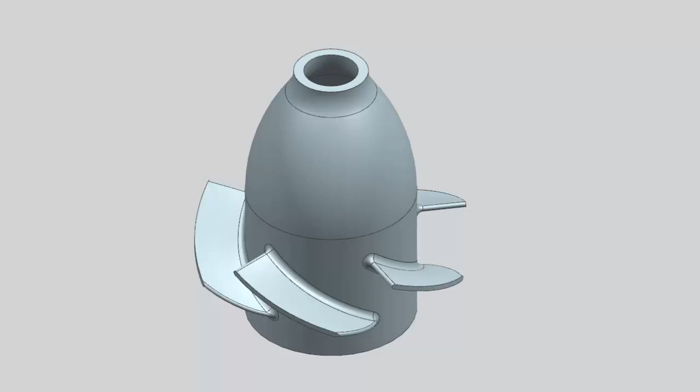Welcome to another in the series of demonstrations designed to get you quickly up to speed with what's new in NX-CAM. This video will demonstrate how you can perform hybrid manufacturing by combining an additive metal deposition process with the traditional NC machining subtractive process to produce highly complex finished parts using a single machine tool setup.

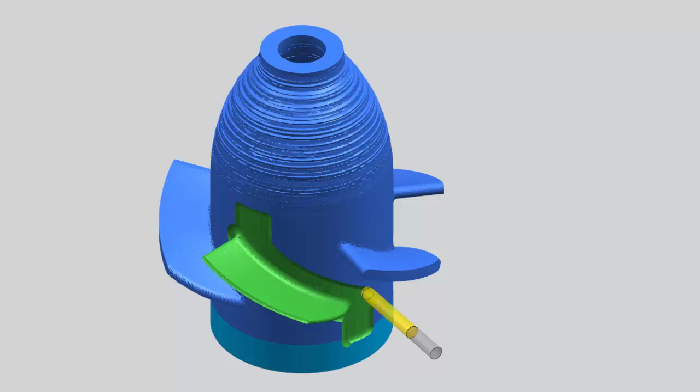In this example, we'll use hybrid manufacturing to create a rotary part. Note that you will need to have an appropriate license to perform hybrid manufacturing. Let's take a look at the objects required to perform hybrid manufacturing.

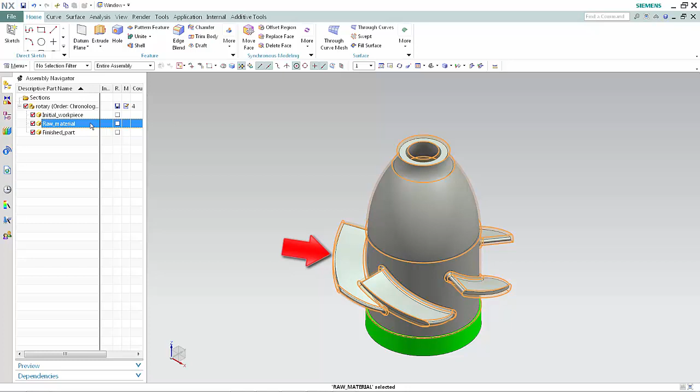The initial workpiece is the plate or base that the material will be deposited onto and is clamped into place as part of the setup. The additive raw material is what will be built through the additive operations. It will be selected as the blank geometry for the subtractive operations. The finished part is the final outcome of the hybrid manufacturing process and is the product of both additive and subtractive operations.

We'll begin by creating the setup. Select File, New. Select the Additive Manufacturing tab. Select the template. Click OK.

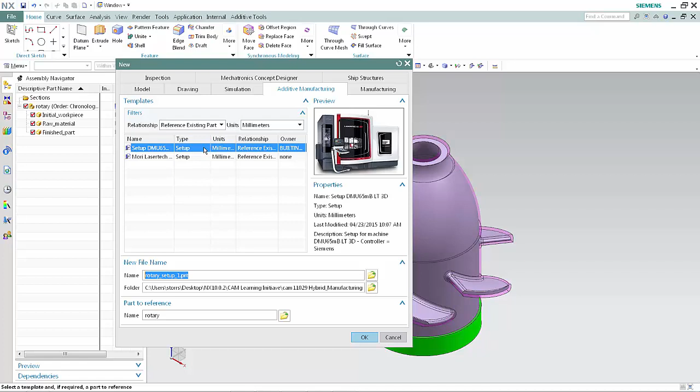The next few steps will remove some of the unnecessary clutter from the graphics window. In the Assembly Navigator, select the checkboxes so that only the initial workpiece, raw material, and finished part are displayed.

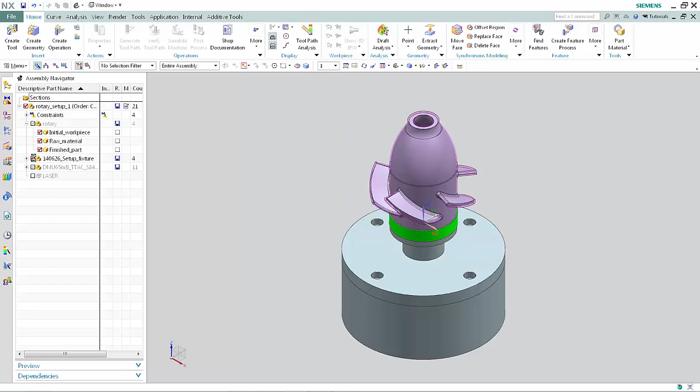Next, we'll create an associative copy of the initial workpiece, the additive raw material, and the finished part bodies. These associative copies are the bodies we'll decompose into additive features and then use for the additive and subtractive operations. Select the Applications tab and select Assemblies in the ribbon bar if it's not already turned on.

Select the Part Navigator tab in the Resource bar. Select Menu, Insert, Associative Copy, Wave Geometry Linker.

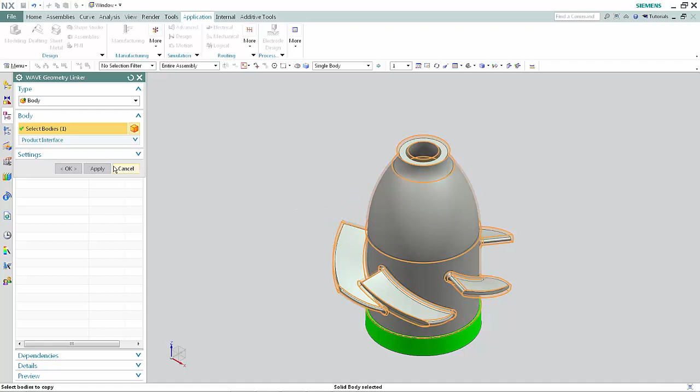Select the raw material. Click Apply. Select the finished part body. Click Apply. Select the initial workpiece. Click OK.

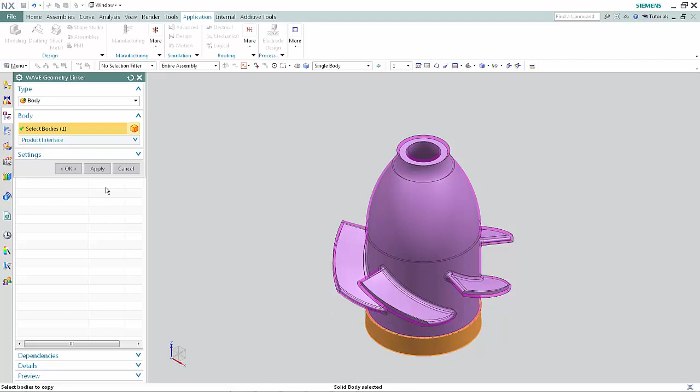Notice the three wave-linked bodies in the Part Navigator. Rename the three bodies.

For now, we will only need to work with the additive raw material linked body, so we'll hide the unnecessary geometry. In the Assembly Navigator, select the Rotary Assembly checkboxes to hide the objects.

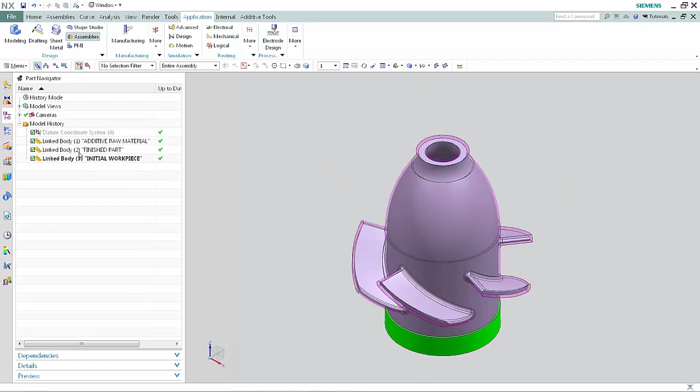Select the Part Navigator tab in the Resource bar. Right-click Finished Part and select Hide. Right-click Initial Workpiece and select Hide. Only the additive raw material linked body should be displayed.

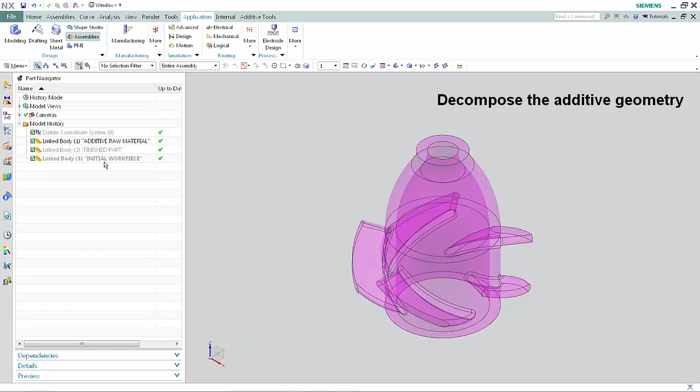Decomposition allows you to divide raw material into individual additive features by extracting bodies. Each additive operation requires a complete body or set of bodies. You may decompose explicitly or automatically.

Explicit decomposition allows you to decompose a specific volume of raw material by specifying a plane that terminates the decomposition at an explicitly defined location.

Select the Additive Tools tab in the ribbon. Select Decompose. For Select Part in the Decompose Part dialog box, select the displayed additive raw material body. For Select Face, select the face on the bottom of the additive raw material as the starting face.

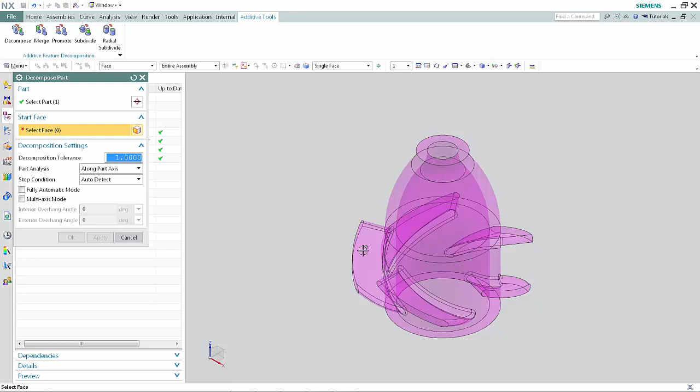Type 10 in the Decomposition Tolerance box. The decomposition tolerance is the increment that the processor uses to step along the part. Larger values result in faster performance, but the value should not be so large that small features will be missed.

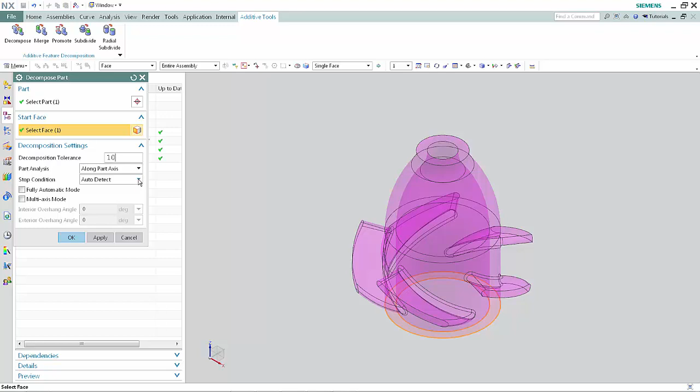Select Stop at Plane from the Stop Condition list. This option allows you to be very specific about the portion of the body you wish to decompose. Select the edge of the additive raw material just above the blades. Click OK.

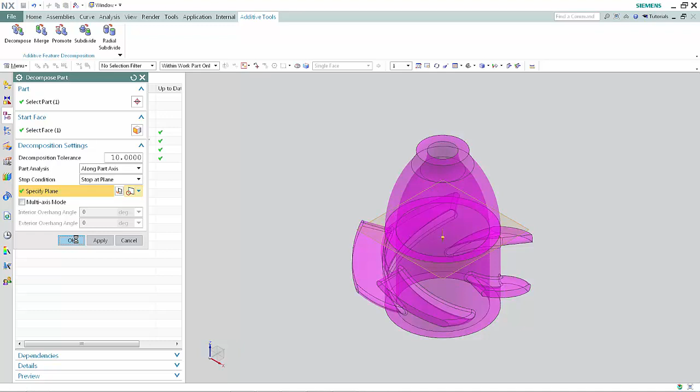The portion of the body between the selected face and the plane has been decomposed into additive features. These new features can be used to create an additive operation.

Next, we'll specify the geometry needed for the additive operations. The base plate is the body onto which the additive material will be initially deposited, and the raw material represents a slightly oversized version of the finished part.

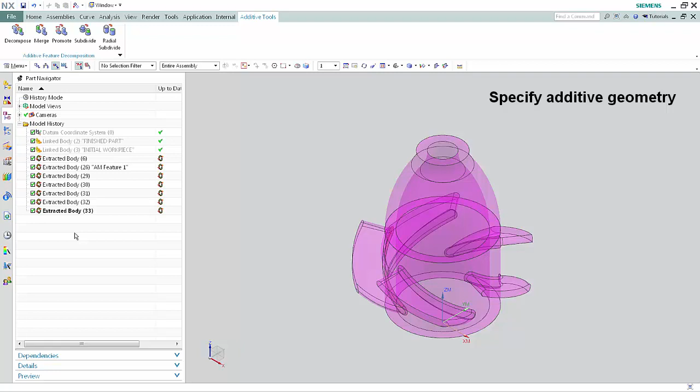Right-click Initial Workpiece and select Show. Select the Operation Navigator tab in the resource bar. In the Geometry view, double-click Hybrid Geometry to edit the object. Click Specify Initial Workpiece.

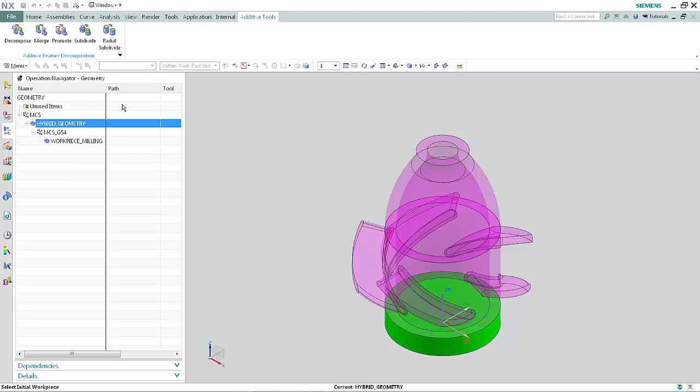The initial workpiece is the plate or base that the additive material will be initially deposited onto. Select the base as the initial workpiece. Click OK.

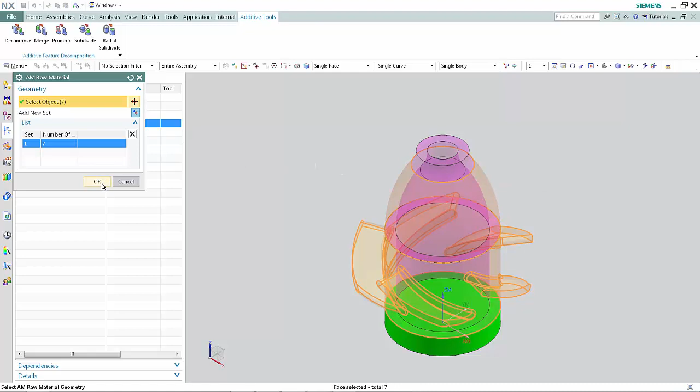Click Specify AM Raw Material. Select the 7 extracted bodies. Click OK. Click OK in the Hybrid Geometry dialog box.

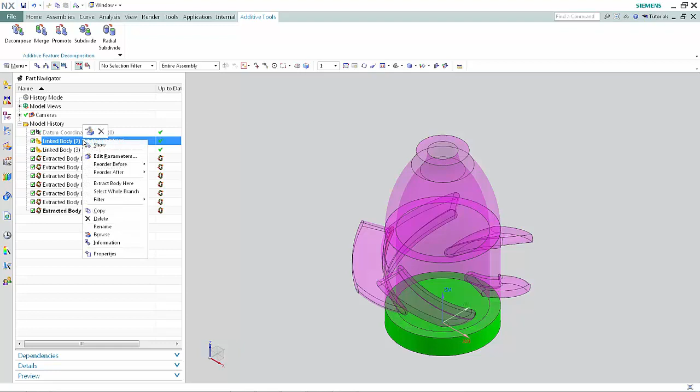Now we'll specify the part and blank geometry for the machining or subtractive operations. Select the Part Navigator tab in the resource bar. Right-click Finished Part and select Show so that the 7 extracted features, the initial workpiece, and the finished part are all displayed. Select the Operation Navigator tab in the resource bar.

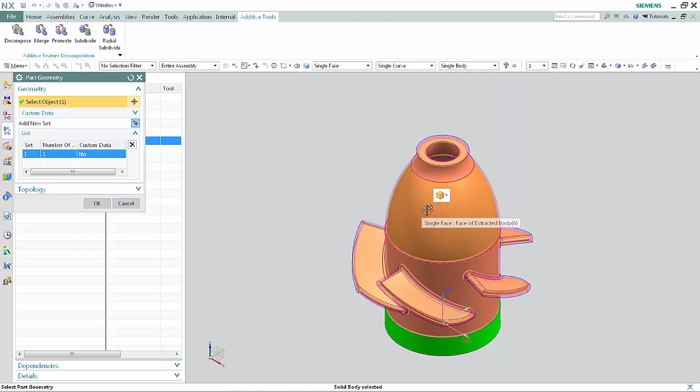Double-click Workpiece Milling to edit the object. Click Specify Part. Select the solid gray body of the finished part as the part geometry. Click OK in the Part Geometry dialog box.

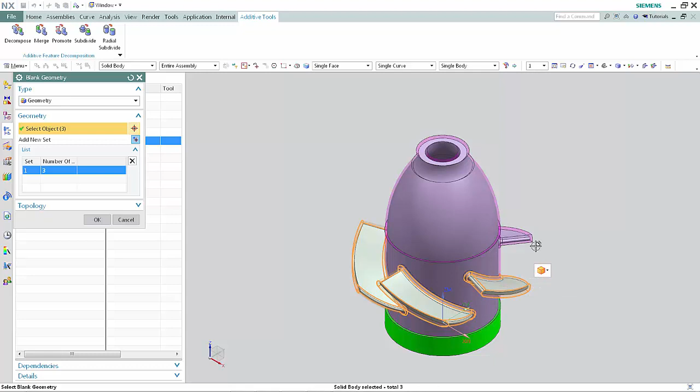Click Specify Blank. Select the 3 extracted bodies as the blank geometry. Click OK in the Blank Geometry dialog box. Click OK in the Workpiece Milling dialog box.

The first additive operation will use planar slicing and a fixed tool axis to form the cylindrical body. Before creating the first additive operation, we'll hide the finished part and the initial workpiece. This will allow us to see the material deposition as the initial workpiece is created.

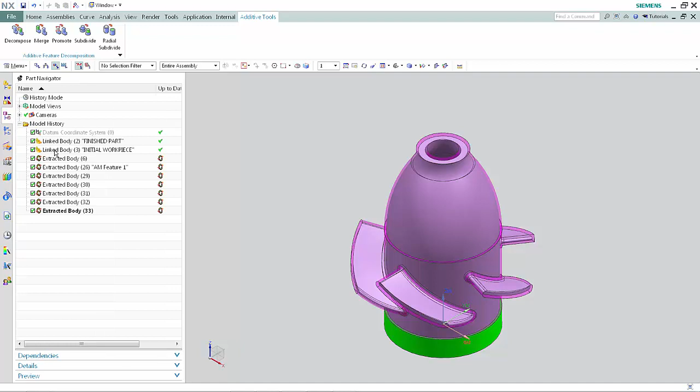Select the Part Navigator tab and hide all of the objects except Extracted Body 26. Select the Home tab. Click Create Operation.

Select Additive from the type list. Select Planar Additive Spiral Inward and Outward as the operation subtype. This operation subtype deposits material in successive planar layers using an inward or outward spiral pattern. Specify the parent items.

Click OK, then click Specify Additive Feature. Select the body you wish the additive feature operation to create, then click OK.

Type 3 in the layer thickness box. This unusually large value will allow you to see the individual layers more clearly. Realistically, the layer thickness would be much smaller than 3 millimeters. Click Generate.

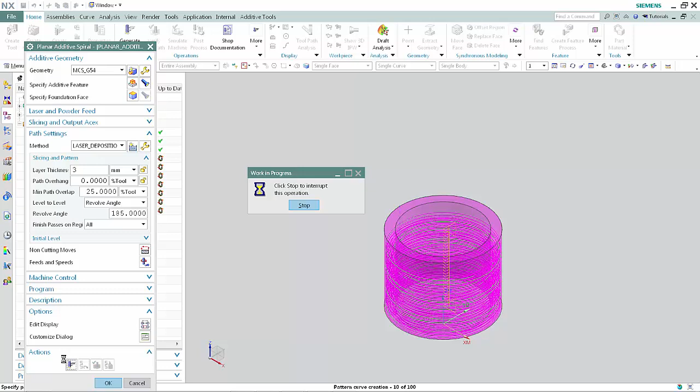Now we can visualize the additive material deposit. Select Verify.

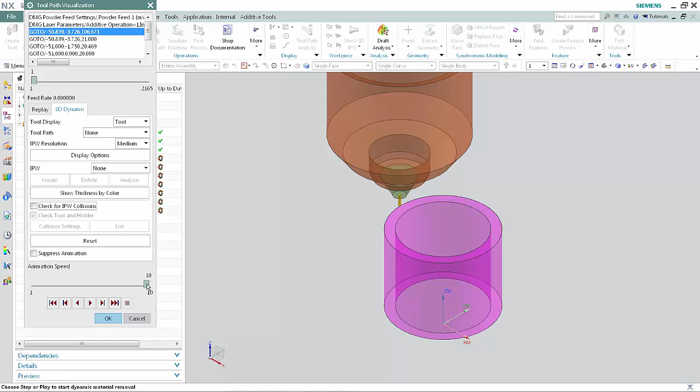Select the 3D Dynamic tab. Clear the Check for IPW Collisions checkbox. This will improve processing time. Set the animation speed and click Play.

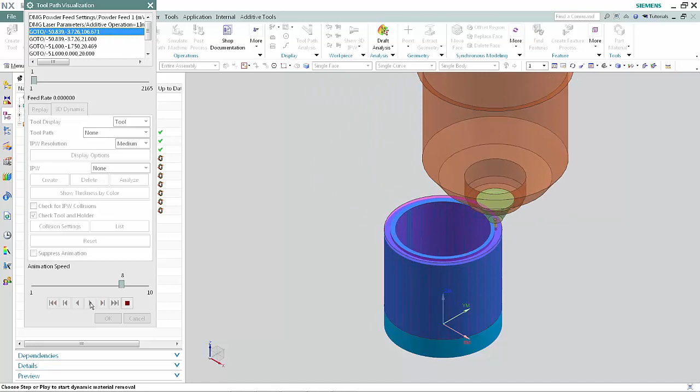Click OK to complete the visualization. Click OK to complete the operation.

Next, we'll create an additive operation that uses profile slicing and a variable tool axis to form one of the blades.

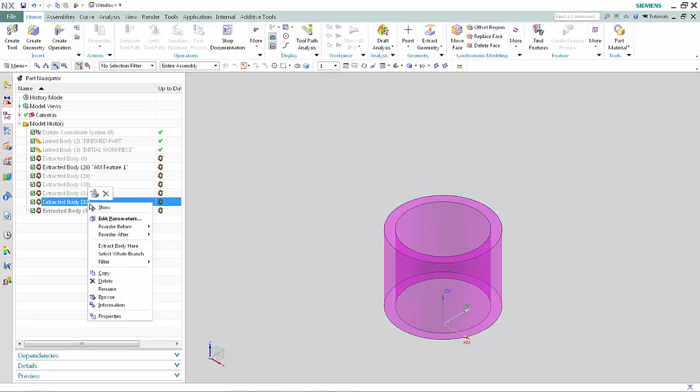Right-click and select Show for extracted body 32. Click Create Operation. Select Rotary Additive Spiral Inward and Outward as the operation subtype.

This operation subtype uses a variable axis output to deposit material in successive rotary layers using an inward or outward spiral pattern on a contoured foundation face. Use the same parent items as specified in the previous operations and click OK.

Select Specify Additive Feature. Select the blade as the body you wish the additive feature operation to create. Click OK.

We'll specify the cylindrical face as the foundation face. Click Specify Foundation Face. Select the outside face of the cylinder. Click OK.

Be sure axis of rotation is set to +ZM. Select Away from Axis of Rotation as the output axis.

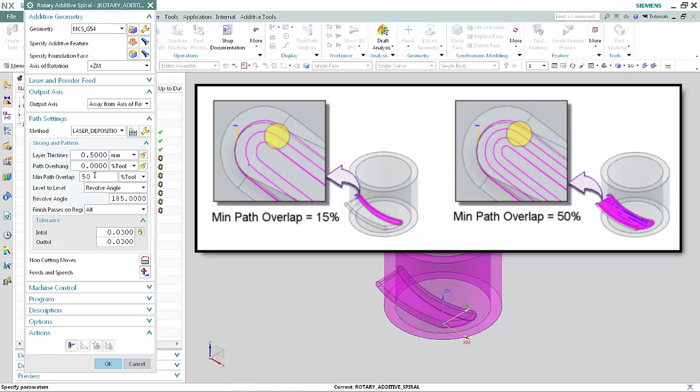Type 50% tool in the minimum path overlap box. This is the minimum amount adjacent paths are allowed to overlap. A larger value permits a greater overlap, allowing deposition to occur within a narrower area. Click Generate.

Now we can visualize the additive material deposit. Click Verify. Click Play.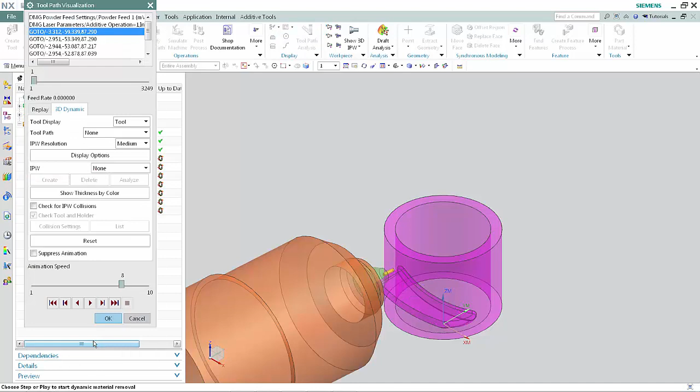Click OK to complete the visualization. Click OK to complete the operation.

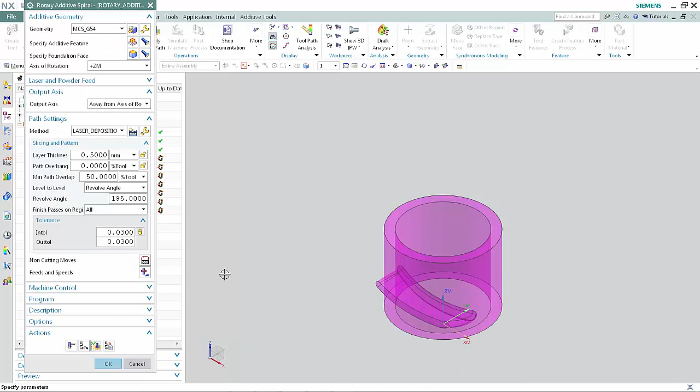Next, we'll instance the blade operation to create the remaining blades. Select the Operation Navigator tab. In the Program Order view of the Operation Navigator, right-click Rotary Additive Spiral and choose Object, Transform.

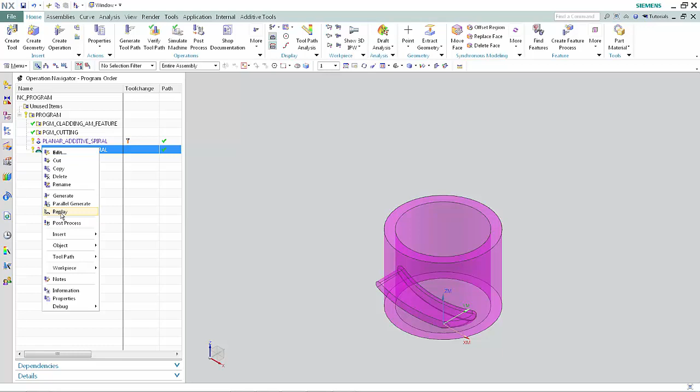Click Specify Point. Click OK to accept the XYZ coordinates.

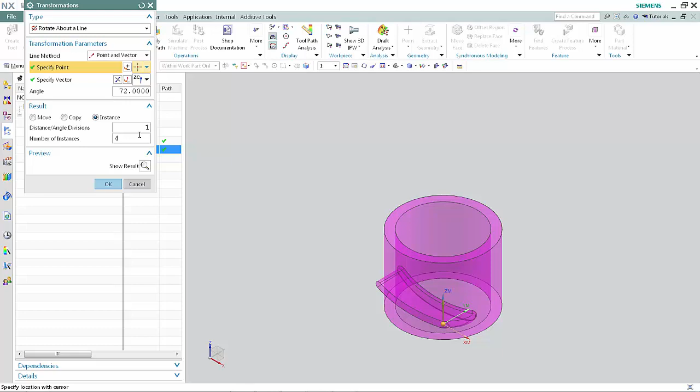Type 360 divided by 5 in the angle box. Type 4 in the number of instances box. Click OK. 4 instanced operations have been created.

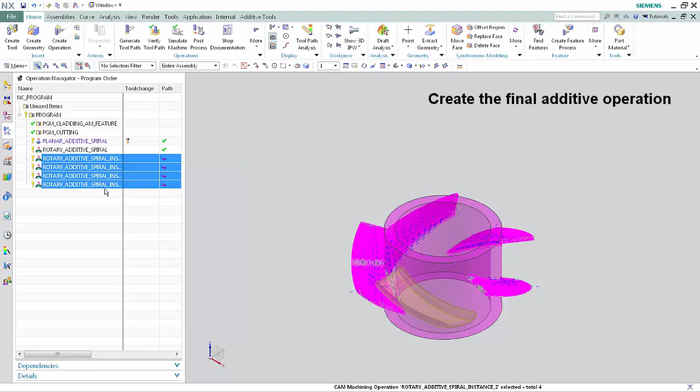Lastly, we'll create an additive operation that forms the top of the part using planar slicing and a variable tool axis that follows the contours of the additive feature when forming the inner and outer walls. A variable tool axis will form smooth walls and prevent depositing material in error.

Select the Part Navigator tab. Right-click and select Show for all of the extracted bodies.

Click Create Operation. Select Planar Additive Spiral Inward and Outward as the operation subtype. Click OK.

Click Specify Additive Feature. Select the body you wish the additive feature operation to create. Click OK.

In the Slicing and Output Axes section of the dialog box, select Automatic from the Output Axis list. Type 2 in the Layer Thickness box. Click Generate.

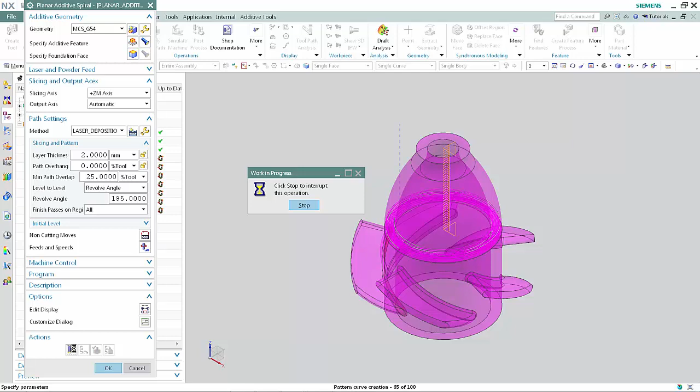Click OK to complete the operation. Now we'll visualize the additive material deposit. Select the Operation Navigator tab.

In the Operation Navigator, select Program. Select Verify Toolpath. Click Play.

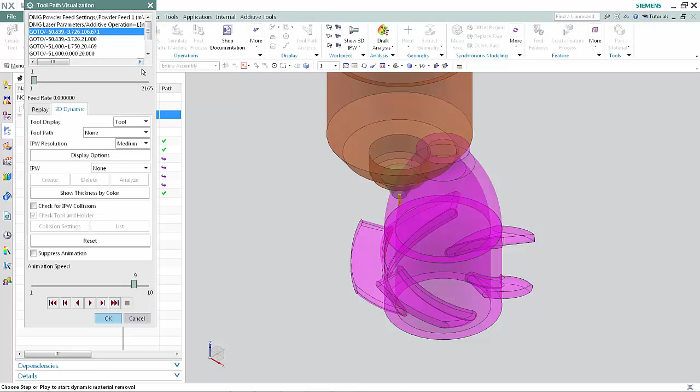Click OK to complete the visualization.

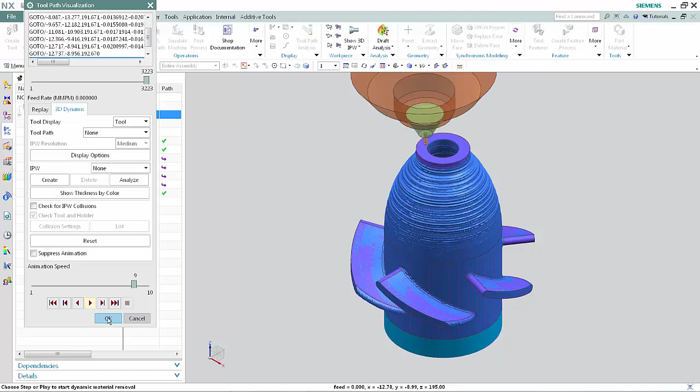Next, we'll begin the process of creating subtractive operations. We'll define the hub, shroud, blade, and blade blend geometry required to machine the part and then finish the blades and hub. Select the Part Navigator.

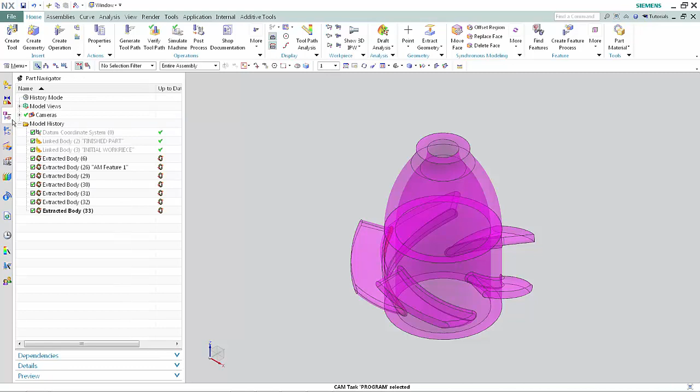Show only the finished part. Click Create Geometry.

Select Mill Multi-Blade from the type list. Click Multi-Blade Geometry. Select Workpiece Milling from the Geometry list. Click OK.

Click Specify Hub. Select the face defining the hub. Click OK.

Click Specify Shroud. Select the face on the edge of the blade. Click OK.

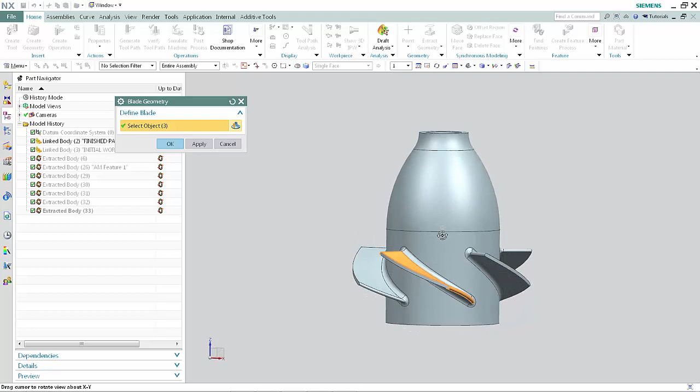Click Specify Blade. Select the three sides of the blade. Click OK.

Select Specify Blade Blend. Select the four faces defining the blend of the blade.

Click OK. Type 5 in the Total Number of Blades box. Click OK.

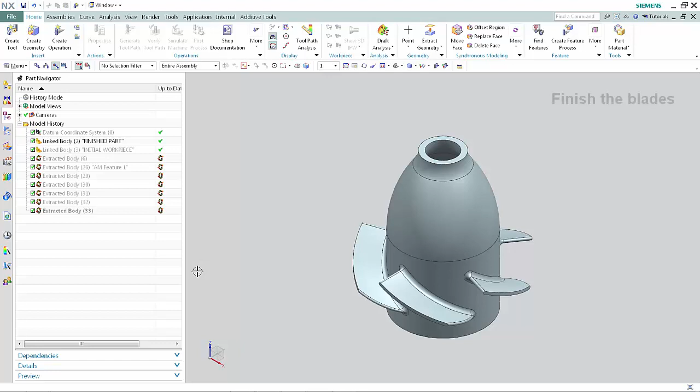Now we'll create a machining operation that finishes the blades. Click Create Operation. Select Blade Finish. Specify the parent items and click OK.

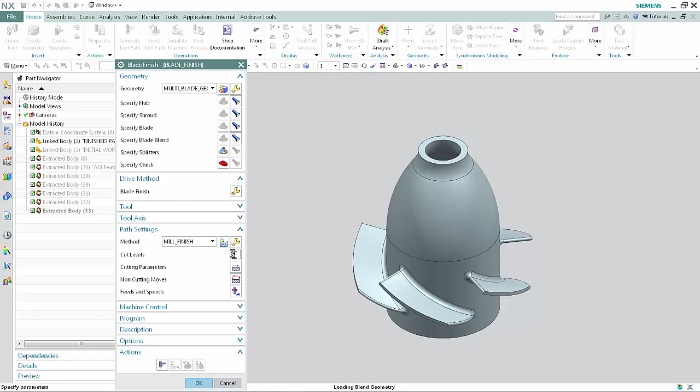Click Cut Levels. Be sure Interpolate from Shroud to Hub has been selected from the Depth Mode list. Select Scallop from the Depth Per Cut list.

Type 0.05 in the Scallop Height box. Click OK.

Click Blade Finish. Select All Sides from the Sides to Cut list. Click OK.

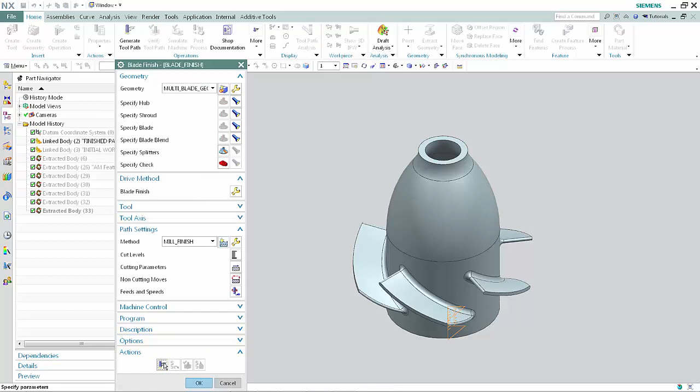Click Generate. Click OK to complete the operation.

Lastly, we'll create an operation that finishes the hub. Select Create Operation. Select Hub Finish. Click OK.

Click Hub Finish. Select Along Part Axis from the Blade Edge list. Specify the distance and the radial extension.

Select Zigzag with Lifts from the Cut Pattern list. Click OK.

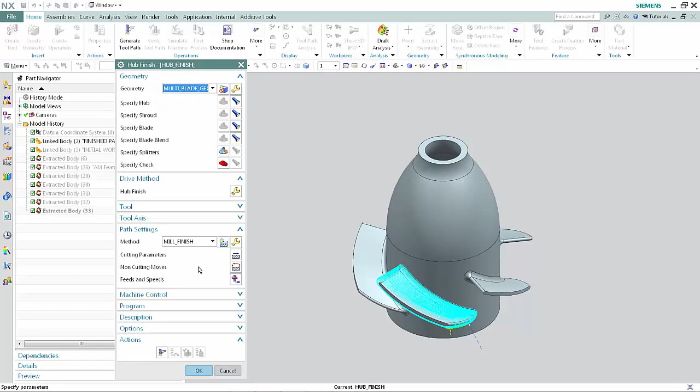Click Generate. Click OK to complete the operation.

The Operation Navigator shows both additive and subtractive operations. Now we can visualize the hybrid program.

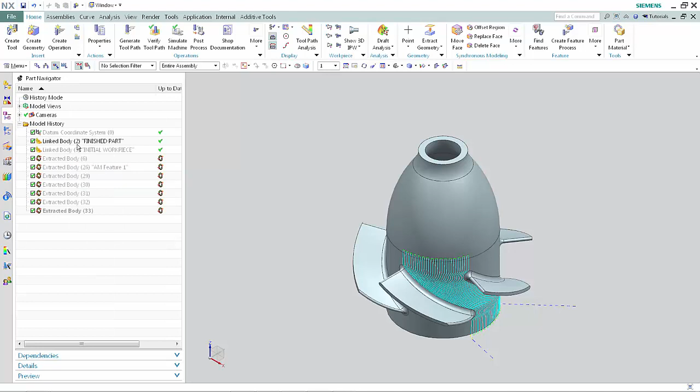Select the Part Navigator. Right-click the finished part and select Hide.

Select the Operation Navigator. In the Program Order view, select Program. Click Verify Toolpath. Click Play.

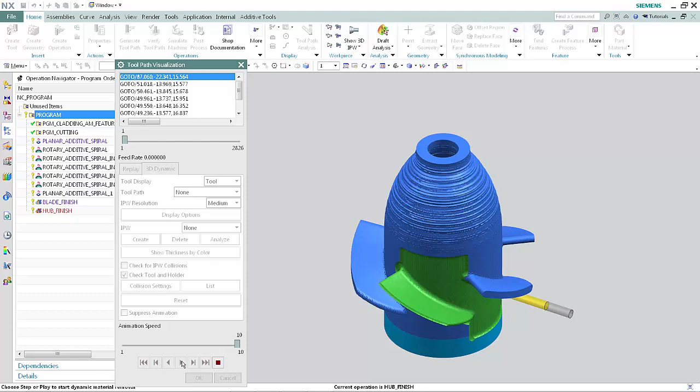The remaining machining operations would include instancing the hub finishing operation as we did with blade finishing, and then finishing the top of the part.

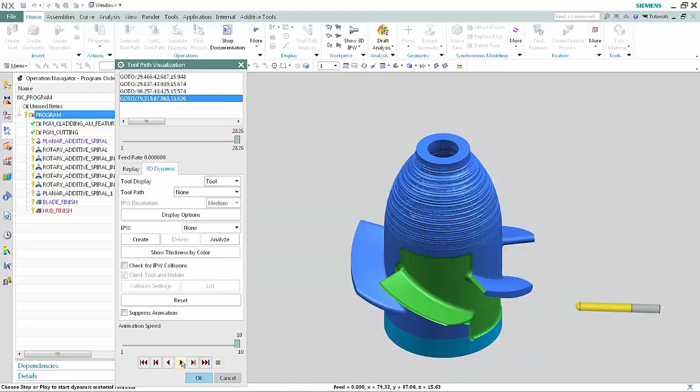This concludes the demonstration of how you can perform hybrid manufacturing by combining additive metal deposition with CNC machining. Thank you.